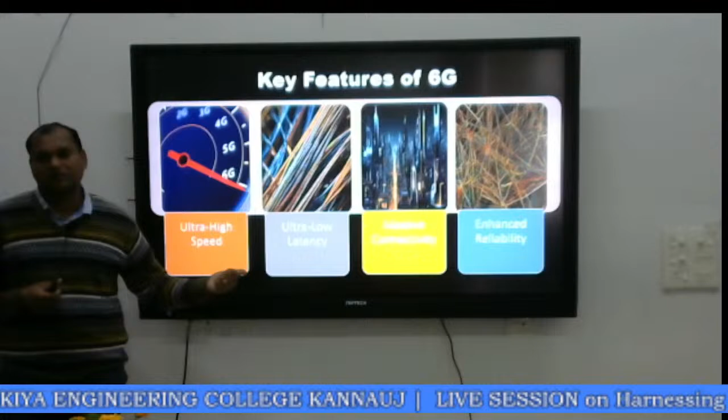And then what is going to be 6G? Are we going to see even higher-speed internet? Or what is so fascinating about 6G that we are going to see? So what we are going to see in 6G is, of course, ultra high speeds. We want to see large uplink and downlink speeds. Then ultra low latency: the latencies between the end-to-end transmissions, you want to reduce them.

Then massive connectivity: you want to connect the majority of the devices on the internet. And enhanced reliability: you want your communication systems to be more reliable. Okay, I'll talk about all these things in the future slides, so I'm not discussing them in detail here. So there is something called the International Mobile Telecommunications.

This actually is the part of the ITU. ITU is the International Telecommunication Union. Now, how these standards are made, I think you should be familiar with how these standards come about. When we talk about 4G, 5G, 6G, or we talk about Wi-Fi, we talk about Bluetooth, any wireless application you see, there is a standard to it.

So we should understand why these standards are essential. Now suppose if I come up in India, let's say from IIT Ropar, saying, okay, this is my standard. I want to build devices according to this set of standards. Set of standards means set of rules, how you want to communicate. For example, what is the bandwidth, what is the modulation scheme, what are the code rates, and so on. So these are a set of rules over which you communicate.

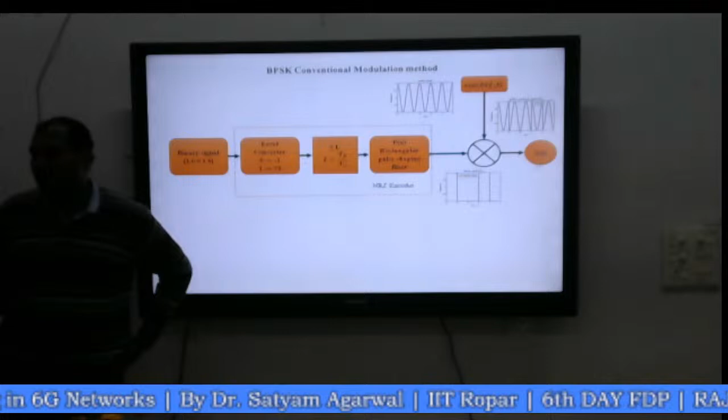Now, I'm going to talk first about the conventional way of receiving the BPSK signal, and then if I employ machine learning, how the receiver structure changes and what performance improvements it brings.

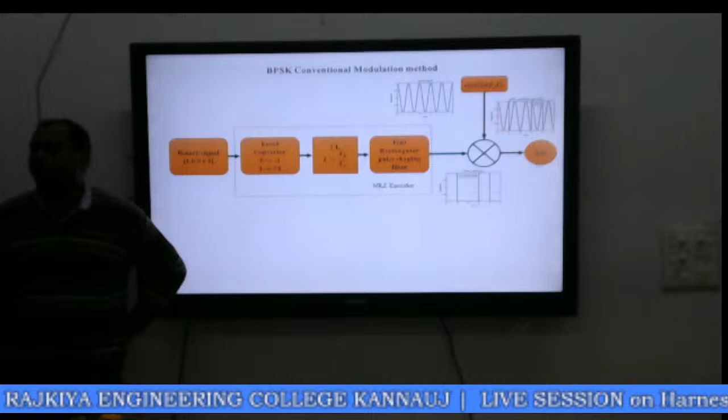So this is first the transmitter part. If you have a BPSK signal and you want to transmit it, you take your binary message signal, first do a level conversion, you do line coding, then you up-convert it, pass it through a pulse shaping filter. How many of you understand what a pulse shaping filter is? How many of you understand what ISI is? Intersymbol interference. So to counteract that intersymbol interference, you do some pulse shaping. And once you do the pulse shaping, you multiply it with your high frequency carrier, and then you transmit it.

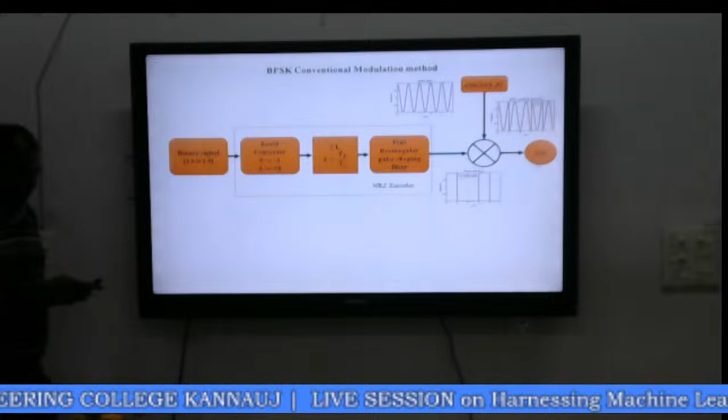And then what you do at the receiver is you take your received signal, multiply it with the local oscillator, pass it through a low pass filter, then you do an integration and then you apply a threshold.

Now, so here you see the main problem is the carrier that you used at the transmitter, that is cos 2 pi FCT. So FC is the carrier frequency. What you do at the receiver is you multiply your received signal with the same carrier.

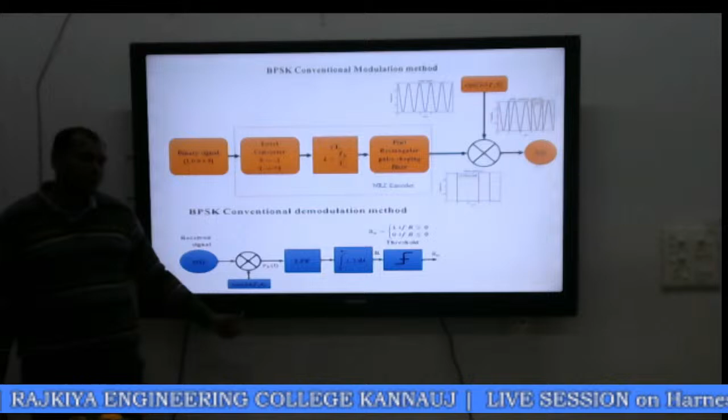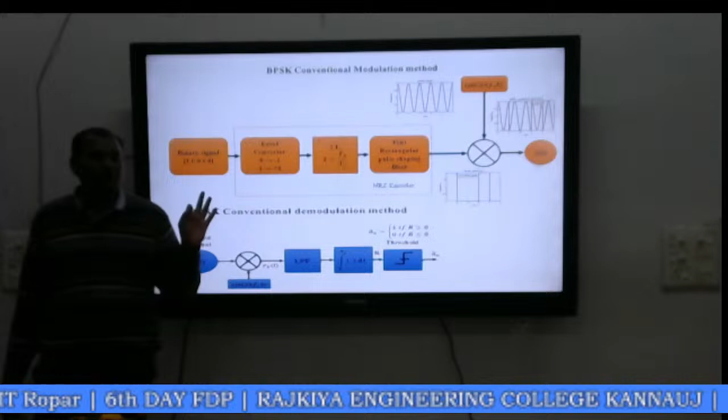Now what happens is this carrier at the receiver is again locally generated. How do you generate a carrier? You use crystal oscillators. Now no two crystal oscillators are going to give you exactly the same frequency. There will be some variation because of temperature variations, mechanical vibrations and so on. So there will be a small phase shift, frequency shift.

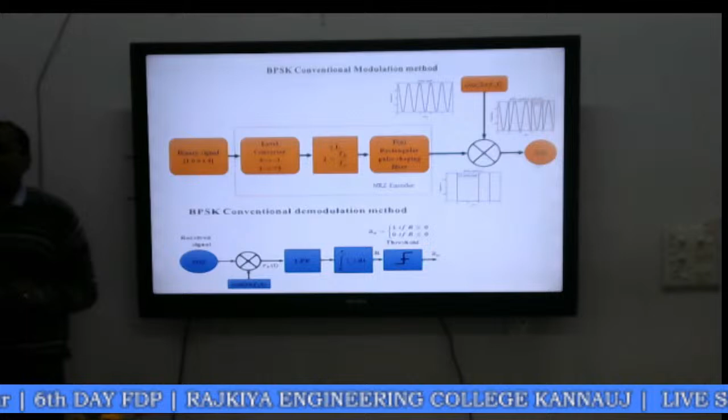When there is a frequency shift here, it propagates to the other parts of the receiver. Now there are systems which can synchronize your receiver frequency with what you transmit. This is called frequency synchronization.

So some of the challenges that you face in a conventional receiver: first, your signal is corrupted by noise, so you are not able to decode it. Then you have path loss, which means as the signal propagates through the medium, it will attenuate. Then you have fading. Then you have a synchronization issue. This is a big issue.

When you are traveling at high speeds, suppose you are in a car or on a train, Vande Bharat let's say, which moves at 160, and we will have high speed trains which will be even faster, there is a Doppler shift in your signal. Because of that Doppler shift, your frequency will keep on changing, fluctuating.

And because of the fast changing channel, if you're using large bandwidth, you're also going to see frequency selective fading. So because of all those things, you will have synchronization issues at the receiver. The receiver has to synchronize the frequency and phase again and again.

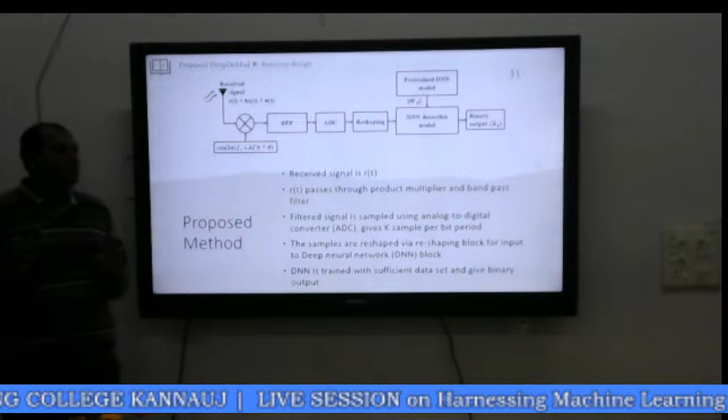After that, you do sampling, because everything has to be done in the digital domain. So first you do the sampling, bring it to the digital domain, and then you do all the processing in the DSP, digital signal processing. So when you are sampling, you first multiply with cos, the other time you multiply it with sine. When you sample the cos component, you get the in-phase, I. When you sample the sine component, you get the quadrature, or Q.

How many of you could understand this part? How many of you could understand this part? This is an important part. So let me explain again.

See, when you are transmitting any signal, let's say you want to use carrier frequency Fc. Now you know cos and sine are orthogonal to each other. So you can modulate sine as well as cos. You modulate one stream with cos 2πFct, another stream you multiply with sine 2πFct. They are on the same frequency, but they are orthogonal to each other, which means they won't interfere.

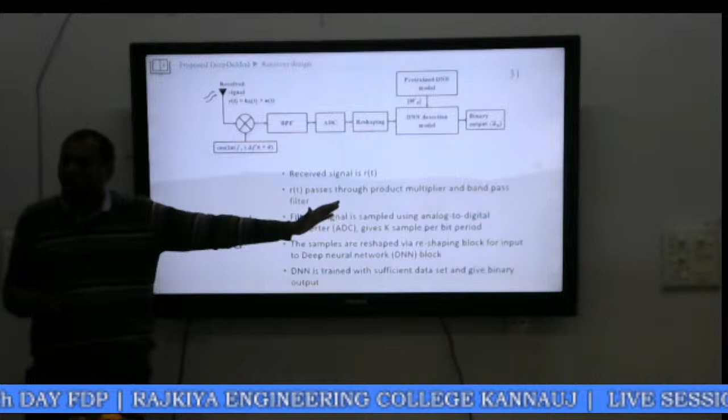So when you are demodulating also, you make two branches out of it. First you multiply with the cos, you get the cos component, you multiply with the sine, you get the sine component. So therefore you get I and Q. I and Q means you get complex samples, I + jQ, complex samples of your received signal. Now once you get these samples, you push them into your DSP and do all the processing. There is a lot of complex processing that goes into your DSP. It is not very simple.

So for all the faculty who are here, last year we actually conducted an MTech laboratory, a communication lab, and in that we introduced these hardware kits to the MTech students. We got around 10 hardware kits, and we made them understand how the reception is done in actuality.

On hardware. So they did the programming on these devices, and they could see for themselves, once you get these samples, how you do the processing. Okay. So how you do the processing is, first you apply actually the automatic gain control. So you have to control the gain of your signal.

Then you apply the frequency synchronization. So you see you have to correct this delta F. Then you apply phase synchronization. That means you have to correct this phi. Then you have to understand the timing synchronization. Timing means, because everything is digital, you understand the bit period. So your bit 0 will be for some time, bit 1 will be for some time, and so on. So there is a bit period. So you have to synchronize the bit periods also.

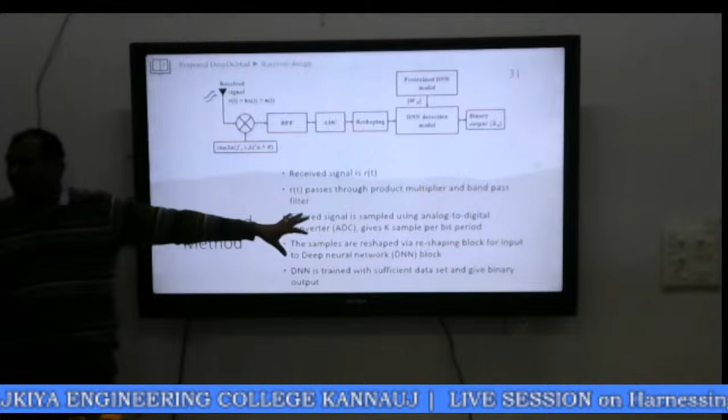Once you get those samples, then you apply your threshold detector. Then you say, okay, for bit 0 I have to see whether positive voltage is there or not. For bit 1 negative voltage is there or not. And then I decide bit 0 or bit 1 and then push it further. Okay. So this is a complete process that goes on in going from the sampled signal to the bit demodulation.

Now applying machine learning to it, how we applied it is like this. We took the received signal, passed it through the local oscillator, and then of course we passed it through a band pass filter. Rather than a low pass filter, we used a band pass filter and applied the ADC. So the sampling is done here. Once you do the sampling, the rest is now going to be pushed into the DSP. The digital signal processor, or any processor, will now process your samples.

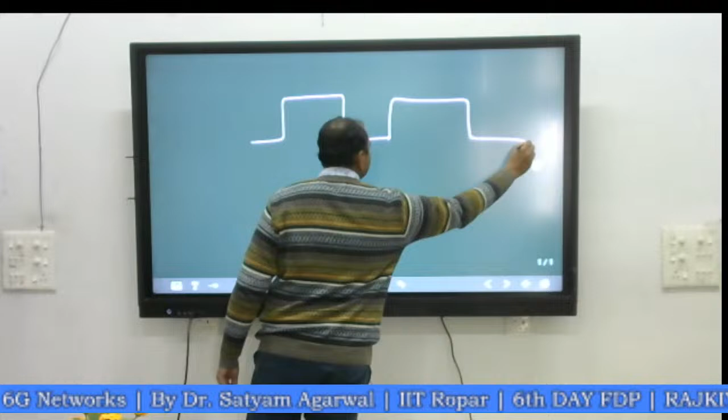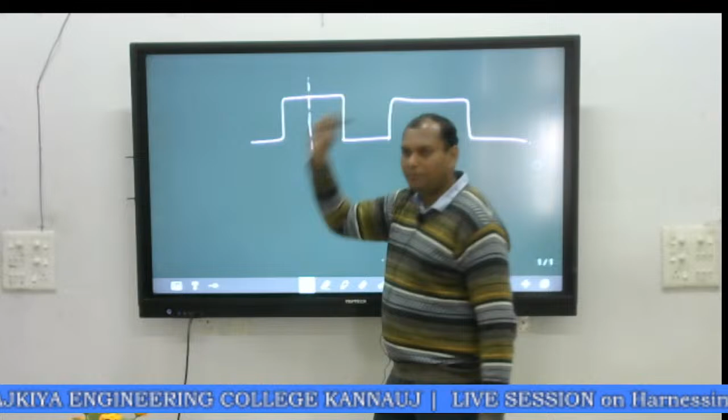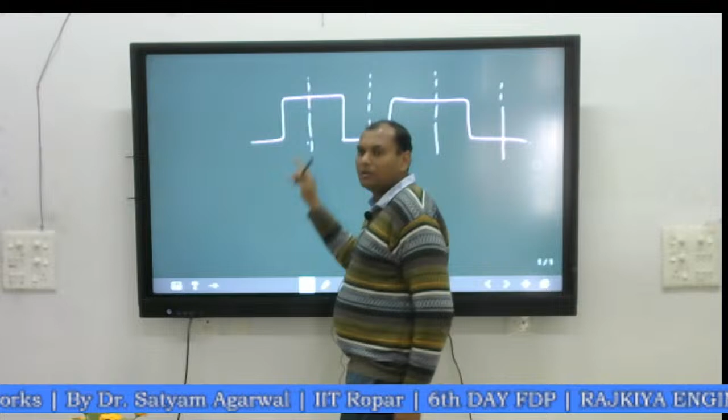So this is your signal that is coming, right? This is a low pass signal. So what you do is basically you have to sample it. Ideally you would want to sample it at the middle of the bit. Okay, so you want to sample it here. And of course you want one sample per bit period. But what you do in actuality is you sample multiple times in a bit period. So that means you take 2 or more.

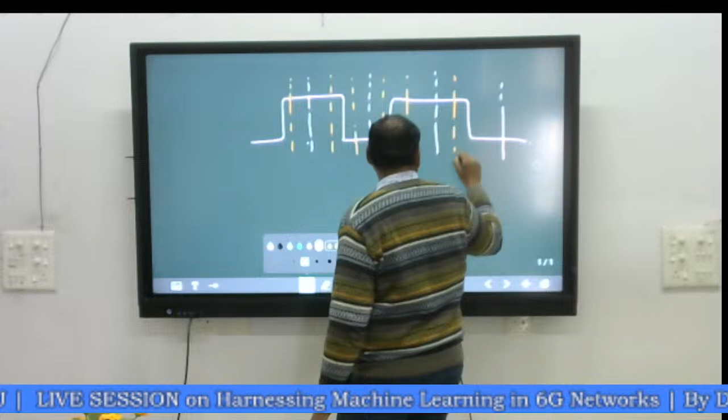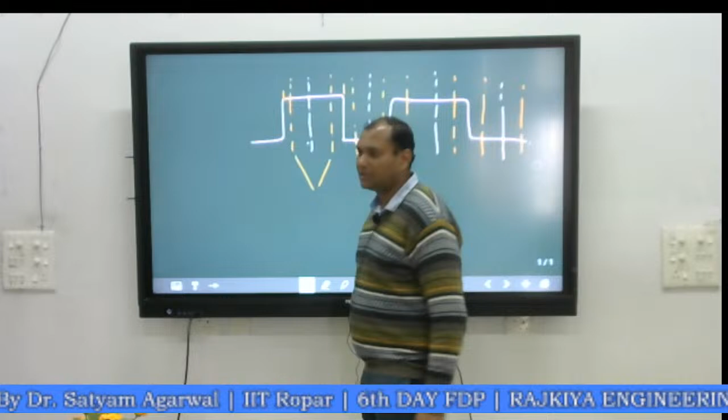So let me draw it like this. So you take two of them. Okay. Why do you take this? Because you want to understand where the bit is starting, where the bit is ending. One sample cannot give you that information. So you need multiple samples.

That is the first thing. Second thing is, once you have done the sampling, you cannot change the samples. Once you have sampled the signal, you cannot change it. You got the samples, that's it. Now the DSP has to do everything. Now in this orange case, if you see, ideally I should sample it here.

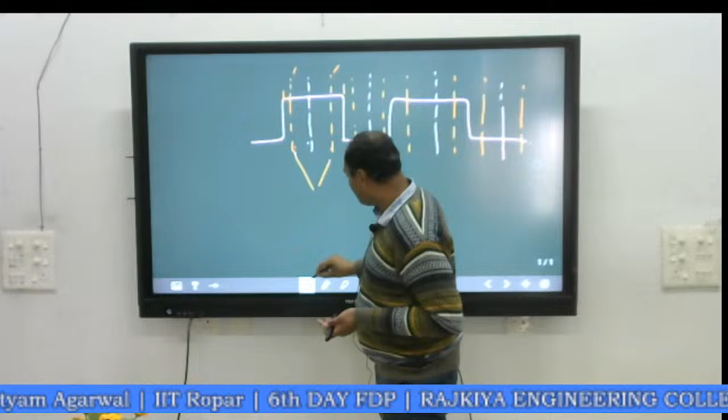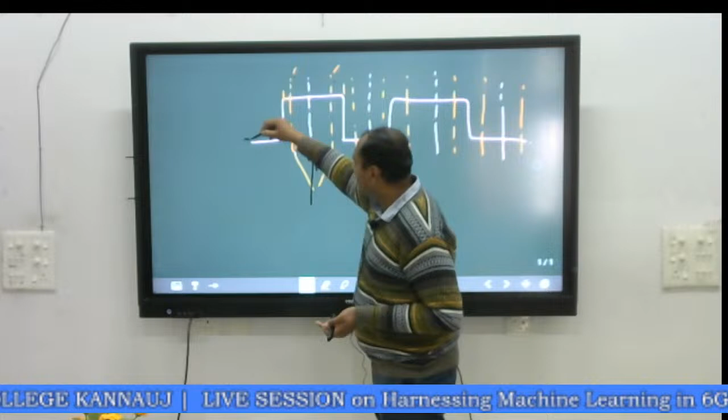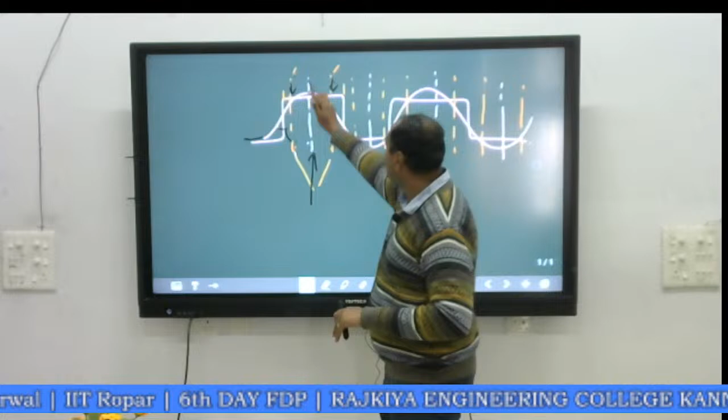But my orange, if you see, it is shifted. What will it give rise to? Suppose there is ISI, what will happen? This will merge into this, so your signal will be something like this. So if you sample at the edges, you will get noise or interference from the previous symbol. So you need to correct the sampling times. What you want is your orange should come here, so here you should sample.

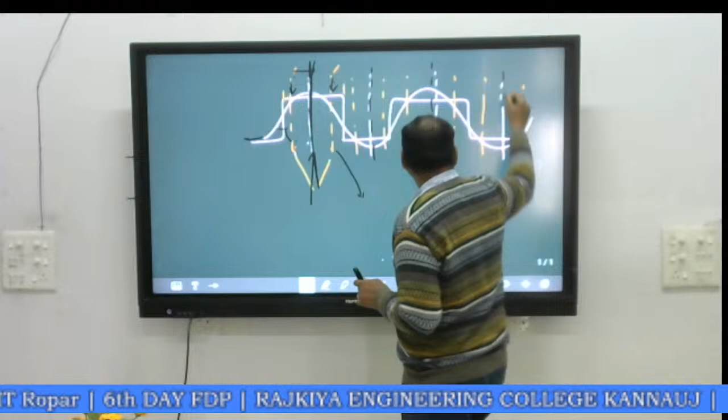So what you do is, you go to the DSP, apply multi-rate signal processing, and you interpolate. You first take these samples and go to a higher rate. Higher rate means you will get samples in between these, and then you interpolate from these two what should be the value here, and then you use these samples. It's a complex process; I'm just telling you very briefly. So this is how you do it in your communication systems. You first sample it, correct for the symbol timing, and then the sampling times.

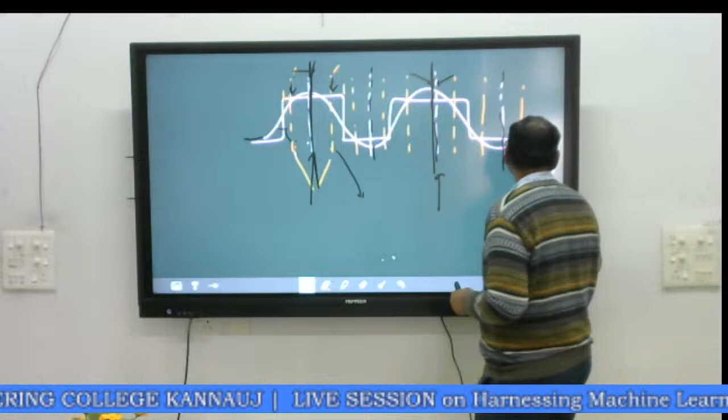Okay. Is it okay? Okay.

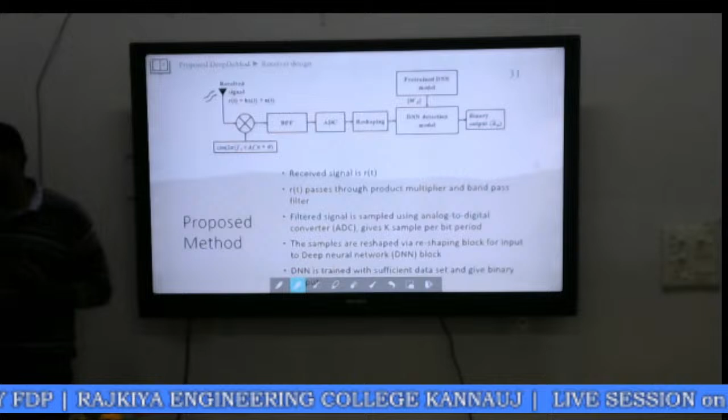Yeah, so I was talking about that thing. The one thing that we introduced is that we sampled at a higher rate than is normally done. So let's say we got 5 samples per bit. This is what we defined as K here. The filtered signal is sampled using an analog to digital converter, giving K samples per bit period. K could range from 5 to 20.

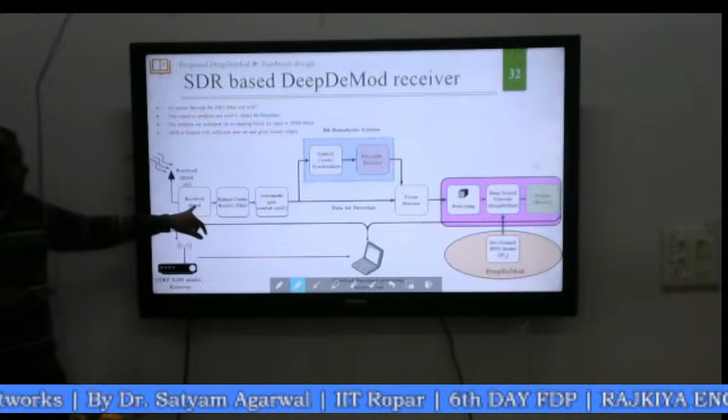Now what we did is that we took our hardware, which is our SDR, software defined radio, and we coded it with our machine learning based demodulator. So how did we do it? We took the received signal, applied a raised cosine filter, AGC, symbol carrier synchronizer, symbol preamble detector, and then we applied the DNN, which we call DeepDeMod, the deep neural network, which is able to demodulate our received signal.

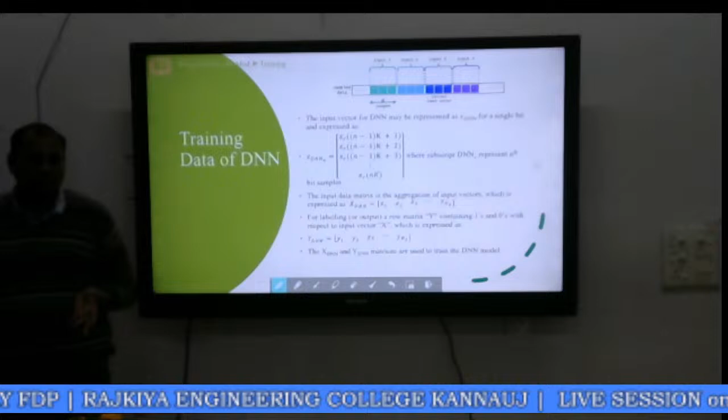So this was the architecture of the DNN. We took 5 layers in the DNN, and 7 neurons, and all the things are there. You know that all these machine learning algorithms need to be trained first, and training was the trickiest part. We took half synthetic data, generated using MATLAB, and half measured data from the environment. We combined these two, made a big pool of data, and then trained our model.

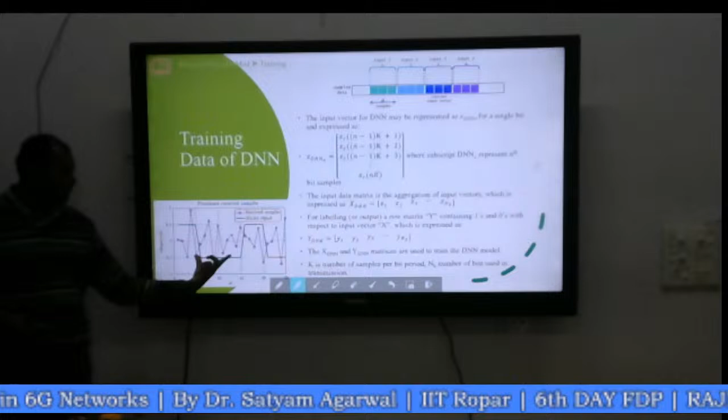So once we train our model, this is how it is going to look. Over a bit period, you get multiple samples, which fluctuate like this. You take this set of values, and for this set of values you get one output, which is bit 0 or bit 1. So K is your input layer and 1 is your output layer.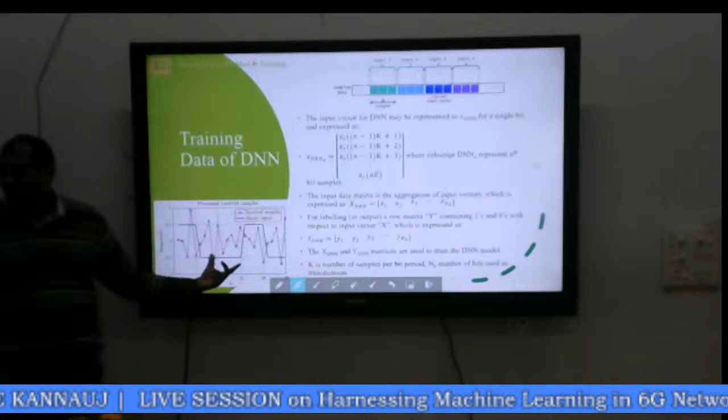And you know that the wireless channel keeps on fluctuating, so you need to retune your machine learning algorithm so that it adapts to the changing environment. We did this using transfer learning. In packet transmissions, you transmit something called pilots, which are used to estimate the channel. So you use the same pilots to retune the DNN. The DNN will learn how the signal is mapping, adapt to the environment, and be optimal for that environment.

Just like everyone does, we started first with a simulation exercise to see whether the improvements are there or not, and then we moved to the hardware part and showed how the improvements are in actuality. So this one is the bit error rate versus SNR in the AWGN channel. Everyone of you understands the AWGN channel; it has no fading.

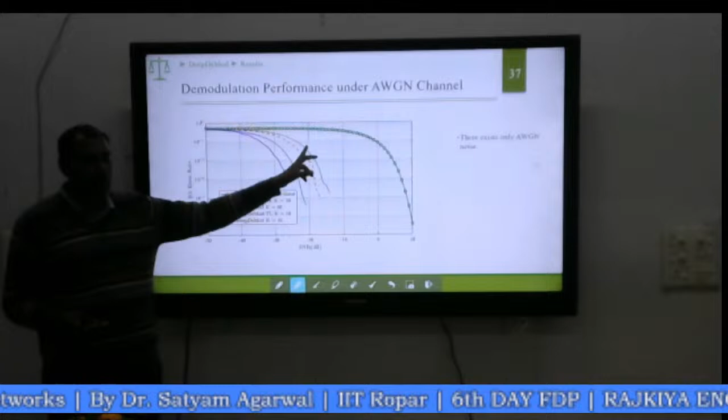The green one is the conventional demodulator. For bit error rate, the lower the better. The conventional is quite high, and then you see our DeepDemod, the deep learning based demodulator, for different values of K, the number of samples per bit. We have taken 10 and 50, and TL is the transfer learning based one. The performance gap is huge. To get, let's say, 10 to the power minus 3, I would get it at minus 15 dB, compared to 8 dB in the conventional case. So see the gains here.

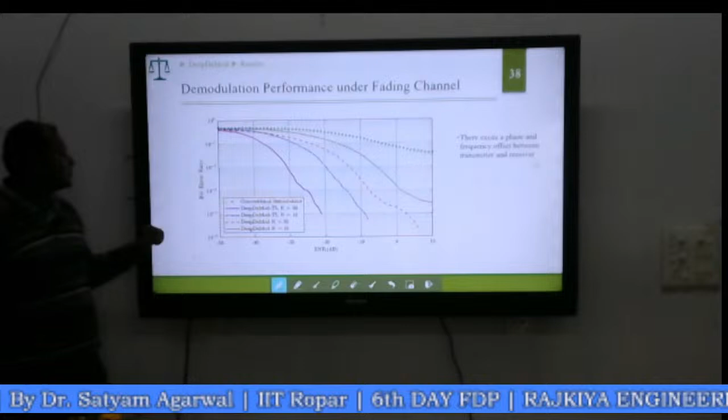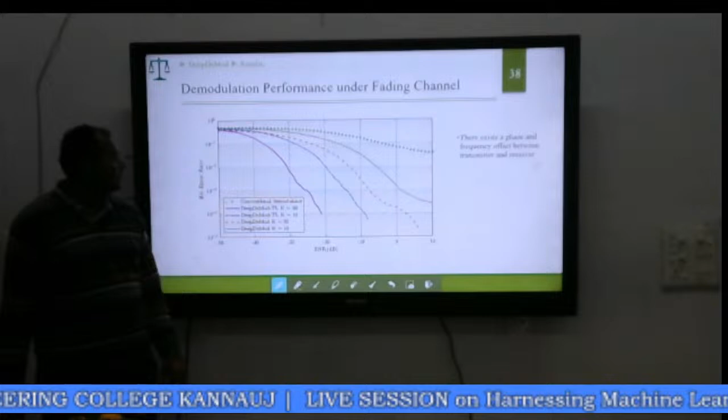And similarly we observe it for the fading channel also. For the fading channel, when there is a phase and frequency offset between the transmitter and receiver, the conventional BER is quite high. For 10 power minus 1, you need an SNR of, let's say, minus 5 dB, compared to minus 15 dB in our case. So more than 10 dB of gain you can see in the machine learning based demodulator.

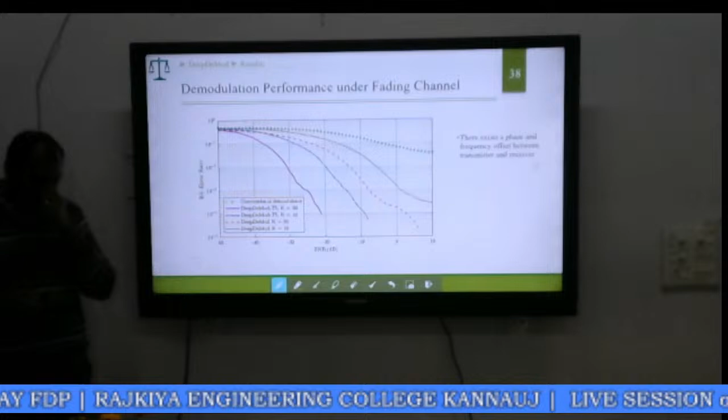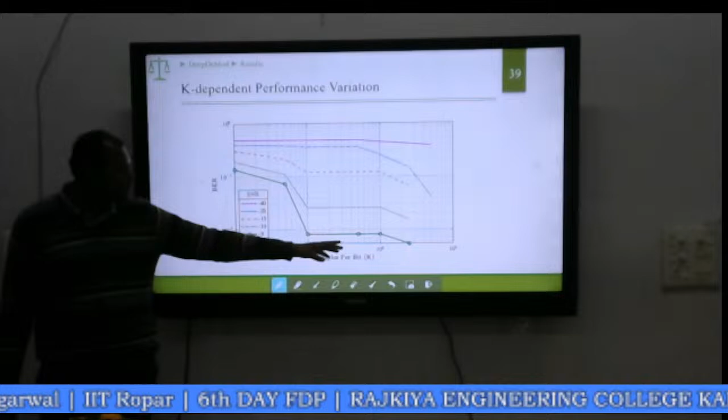Okay. And then you would be wondering how the system will perform if we increase the number of samples per bit. So we actually started with 10 and went up to 10^3, so 1000 samples per bit. So if you keep on increasing the number of samples, you are going to see huge improvements in the BER. Now the side effect is that if you collect more samples, then your processing also increases. You have to process those many samples for every bit.

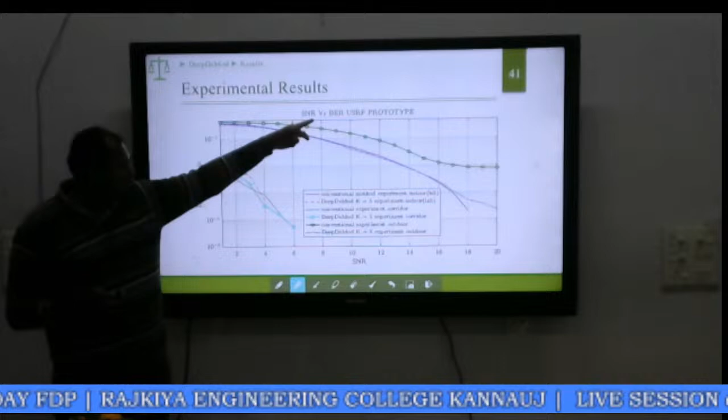So this is the result that we got from our experiments. Indoor, corridor, and outdoor are all there. We took k equal to 5 only, so 5 samples per bit. Here the green one is the conventional one, and this is our DeepDemod, which is deep learning based.

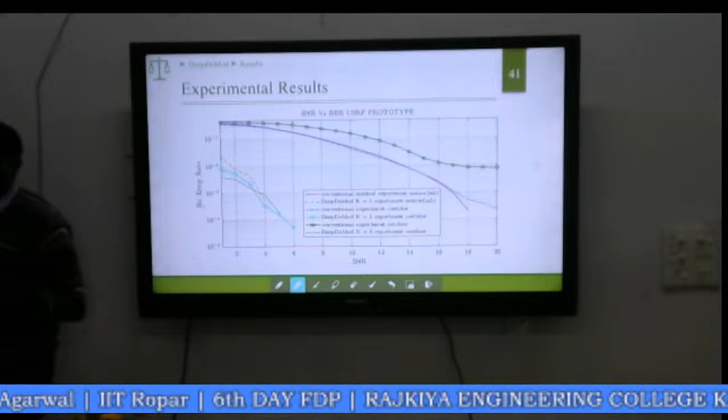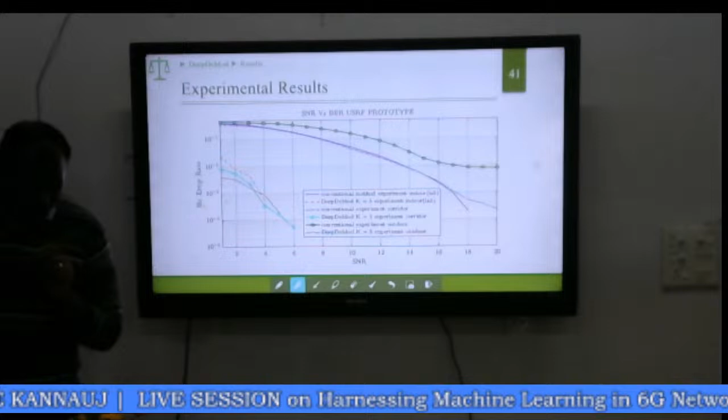So let's say for 10^-2, I would achieve it at 2 dB SNR, as compared to this one, which will achieve it at 14 dB. So again, you see 12 dB of improvement. Okay. So these are experimental results. Okay, so this is the first part of my research talk. If you have any questions, I can take them up now, or otherwise we will move forward.

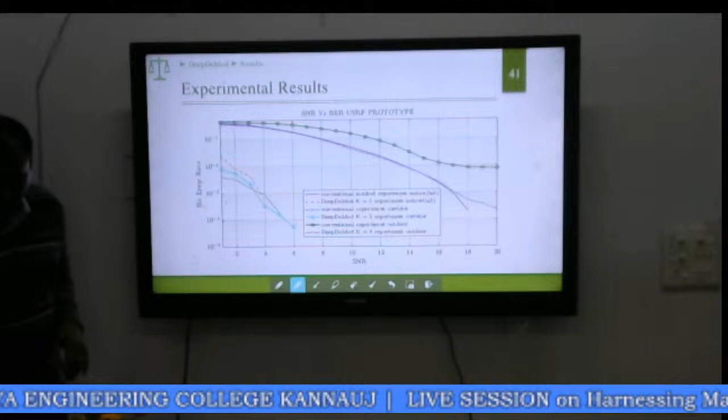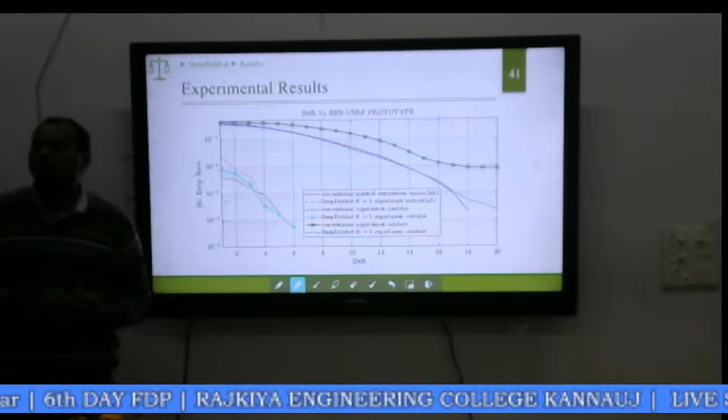All right. So till now we talked about the SISO system. SISO means single input, single output. That means single transmit antenna, single receive antenna. Now you see our communication systems are now becoming MIMO. Everything is MIMO. So you have multiple transmit antennas and multiple receive antennas. So we are going to take one step forward, and now I am going to talk about the MISO system. MISO means multiple transmit antennas, single receiver. So this is MISO. You have multiple transmit antennas, and there is one receiver, which is a single antenna. Okay.

So what is the gain that you get in a MISO system? Why do you want to go to MIMO? What is the motivation behind going to a MIMO system? Anyone? Better data transmission. Okay. And high throughput. Okay. Anyone else? Energy consumption is less. Okay. Anyone else? Why do you get high throughput? Can anyone tell that? Why do you get high throughput in MIMO systems?

Sorry? Connectivity. Faster connectivity. No, give a technical answer. It's reliable communication. Yeah, but why is it reliable? Why does it give reliable communication? So you know one of the major problems of wireless communication is fading. What is fading? When I am transmitting a signal from here to there, the signal can go directly. It will reflect from the wall, from the floor, from the ceiling, and so on.

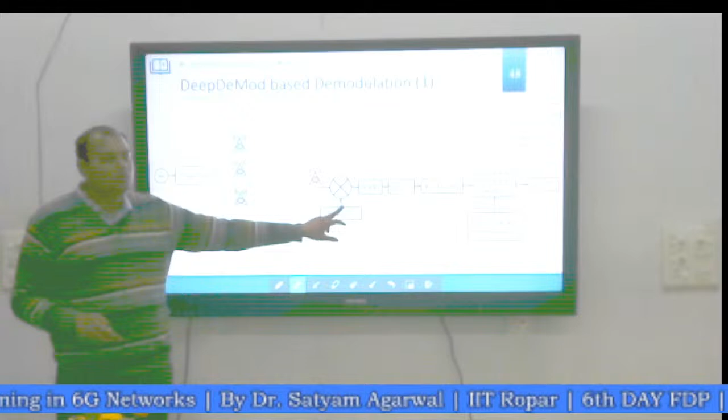So what we do is we use deep learning, a deep neural network, to receive this MISO signal and demodulate it without using channel state information. Without using CSI, we are going to demodulate the signal. So again we do the same thing: we receive the signal, multiply with the local oscillator, apply the low pass filter, then the analog-to-digital converter, and then the DNN, the neural network.

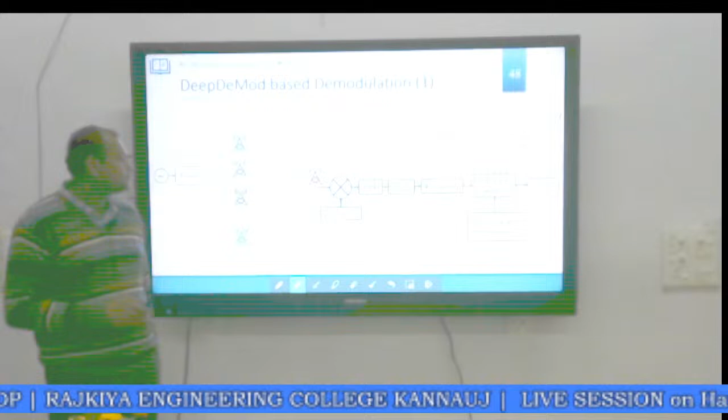Okay, so I am going to show you the simulation results now. So again the green one is the conventional demodulator for one transmitter, one receiver. And then we have Alamouti for two transmitters, one receiver. If you are using a MISO system, Alamouti is the optimal solution. Then we have maximum ratio transmission with estimated channel, two transmitters, one receiver, and MRT with channel known, two transmitters and one receiver. So these four are here.

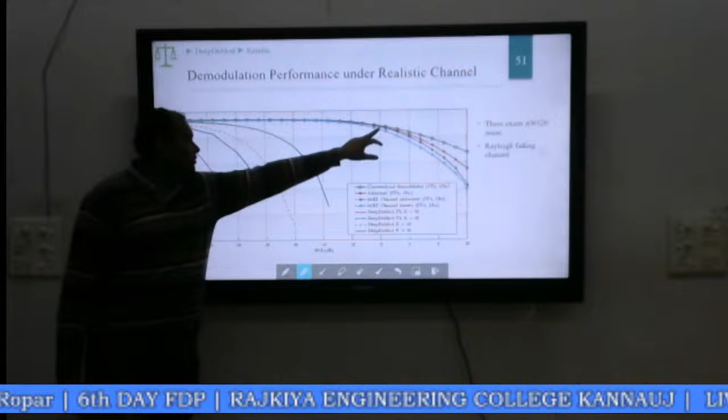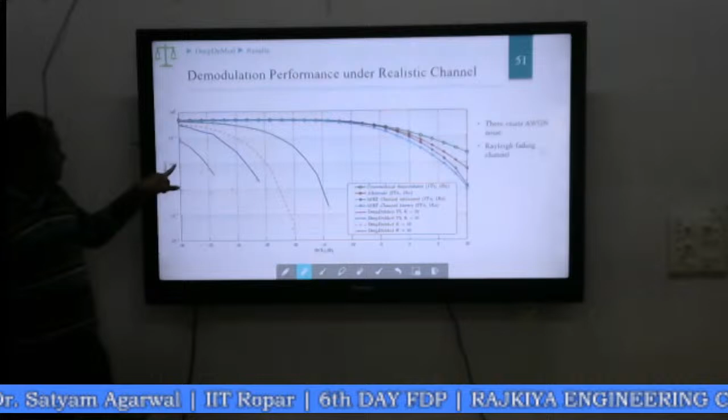You can see the bit error rate performance of these conventional systems, and if you use DeepDemod, you can see the performance improvements here. With k equal to 50, you see these two, and with k equal to 10, you see these two. So let's say for 10 power minus 2 BER, I can achieve it at minus 17 dB versus if you use that, you have to have 6 dB SNR. So about 20 dB SNR gain.

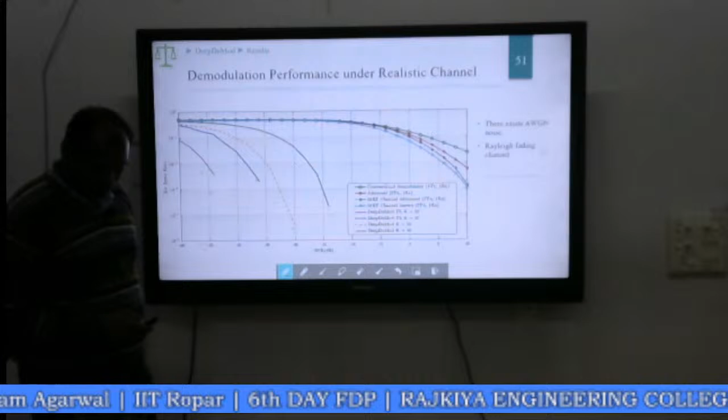Okay, so this was for the fading channel. I'm not going to discuss that again. Same thing. So we did the experiments for this also. This is our transmitter with two antennas, and the receiver is on the other part, and we did it in an open area. Okay, here.

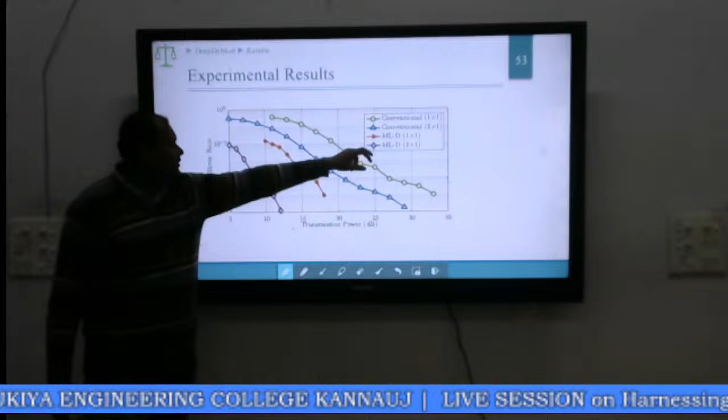And these are the experimental results. So four things I have plotted here: the conventional 1x1, 2x1, and the ML based detector 1x1 and 2x1. So if you see the green and red, so these are these two. So again for 10 power minus 4, you can get it at 17 versus 21. And if you use an ML based detector for a MISO system 2x1, so this is the purple one and the blue one.

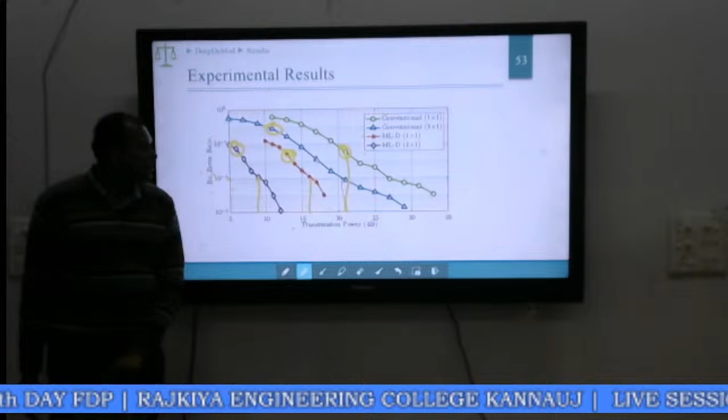Okay. So again for 10 power minus 4, you get it at 8 and this one, right? 8 and 21. Okay, sorry, this one also. Okay, so again you can see the gains, 15 dBs of gain. So this was about the MISO system.

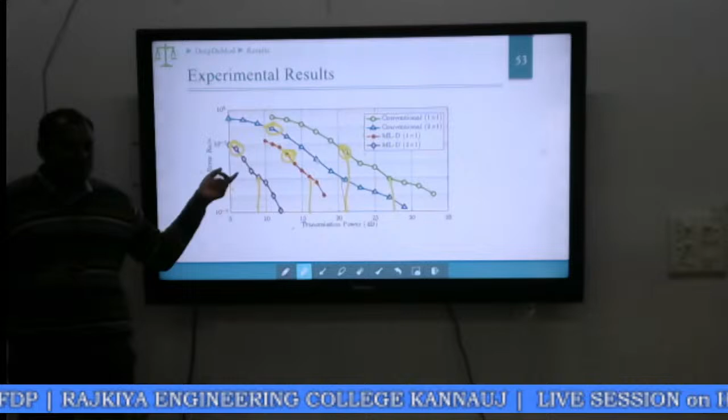I'm going to take just one step more, talk about distributed MISO, and then I talk about what is the challenge here. Though you are going to see good gains, what is the challenge, that is also important to understand. So distributed MIMO: now you see when you have a MIMO system or a MISO system, your transmit antennas are sitting on the same system. So for example, I have a mobile phone and suppose if it has two antennas, it will be connected to a single crystal oscillator, which means that it is being fed by the same source.

Okay. Now you see in IoT systems, you want to have your devices to be very low powered. You do not have the luxury to build multiple antennas on the same device, because that will make your device bulky, that will consume power and so on. In those cases, you want to use the concepts of MIMO, but you want your antennas to sit on different devices altogether. So one IoT device is here, second one could be in another room. They should collaborate together and transmit the information to the receiver. So this is what we want. Multiple transmitters come together to send information to a very far off receiver.

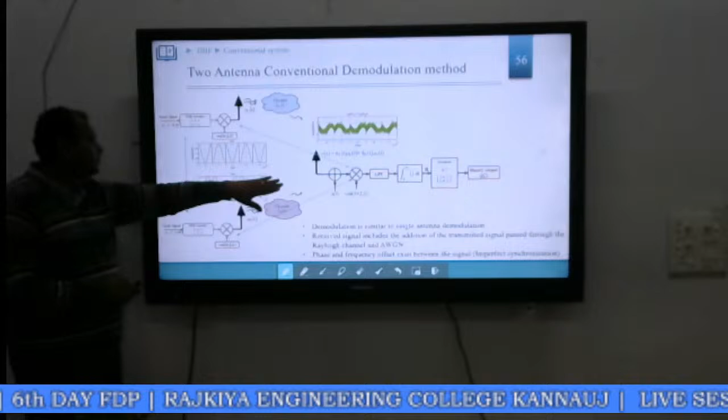Okay, so we call it distributed beamforming or distributed MIMO also. Of course you get the same gains as that of MIMO; I'm not going to go into that. So suppose I've taken two transmitters transmitting the same signal, with different frequency and phase offsets, you get a complex signal at the receiver. From this complex signal at the receiver, you have to figure out what bit was transmitted.

So another example is an orchestra. If everyone is playing in a different way, you won't get anything. But if everyone plays coherently, then you hear a nice melodious sound. So the same thing here. So these are the challenges: carrier synchronization, phase synchronization, timing synchronization, and coordination of the information between the different transmitters. Okay, so again what we did is we applied the deep neural network to our receiver and implemented it on the hardware as well. So again, I'm not going to do the same things.

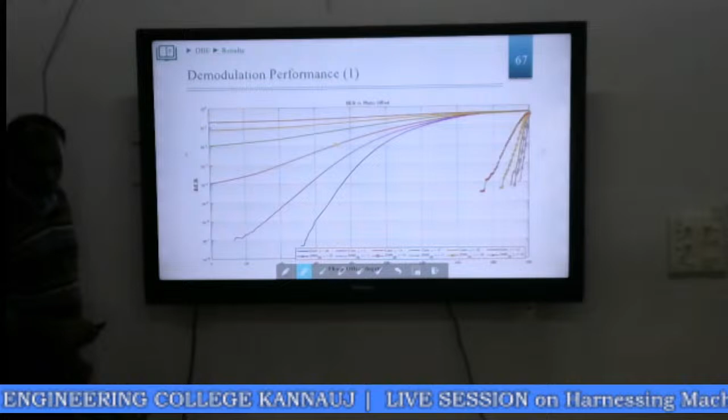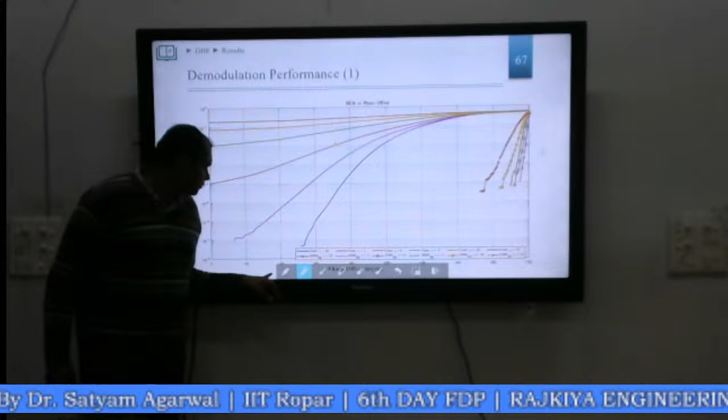So this is the demodulation performance. So here actually I have projected phase offset. Okay, phase offset in degrees versus the bit error rate. So if you have two transmitters, suppose they transmit at exactly the same frequency, but there is a phase offset between the two. Okay. Now if there is a phase offset, what will happen at the receiver? These two signals will combine together.

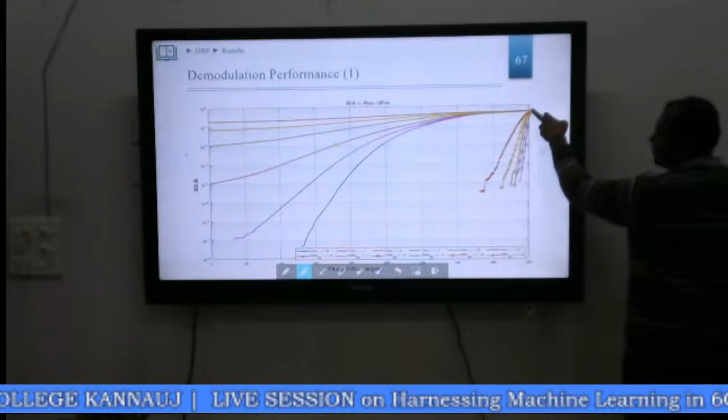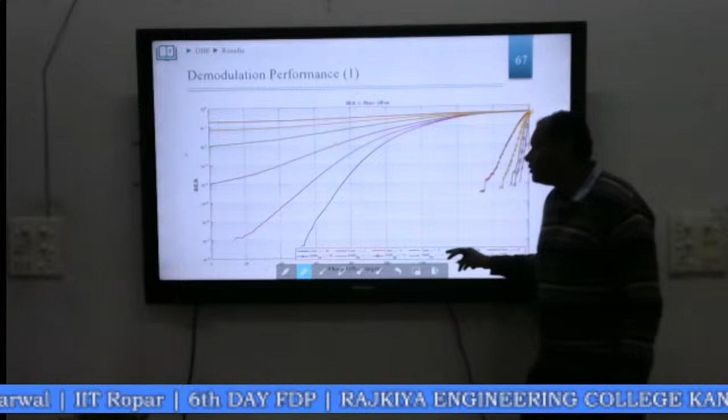So suppose if they are 180 degrees out of phase, then these two will subtract and you will get 0. Right? So the same thing you see here also. So if you see here, this is 180 degrees and the bit error rate is 0.5. 0.5 means you are not getting anything. As you keep on decreasing the phase offset to 0, you get the perfect synchronization. That means these two signals will add up coherently. And in between, there is a gray area where you are going to see the change in the performance.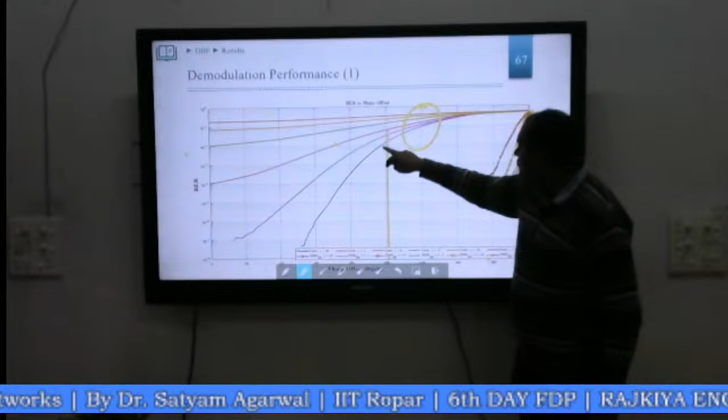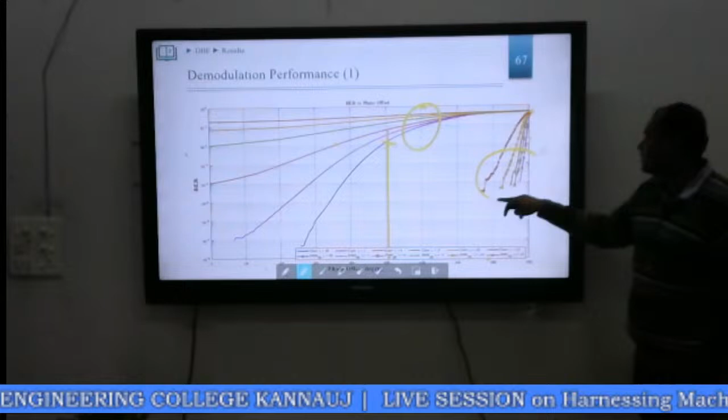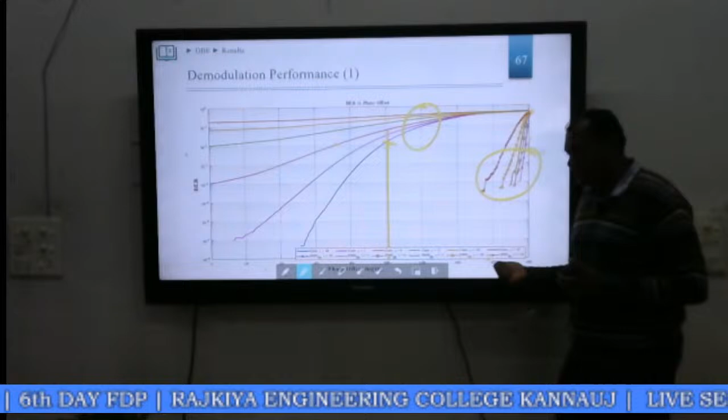Okay. So the point I am trying to say is that even if you have an imperfect combination of signals at the receiver, the deep neural network can still decode your signal, which the conventional receiver cannot detect. Okay. So this is one of the advantages of using machine learning in communication systems. You don't need to bother about the imperfections anymore. The machine learning algorithm can itself understand what imperfect signal you are receiving, and based on that it can make its decision.

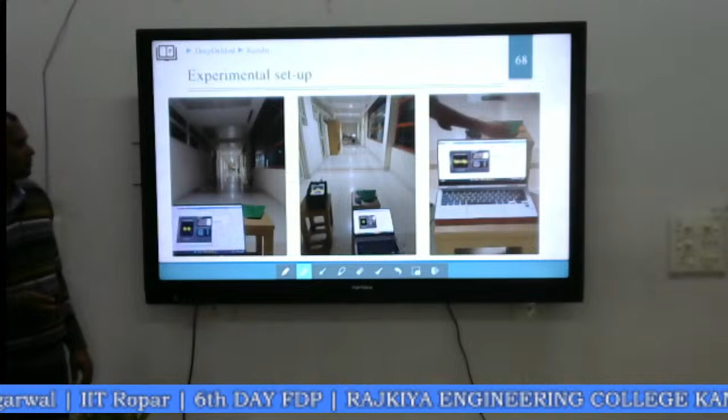Okay. So again we did certain experiments. Yeah, we did some experiments again in the corridors, in the lab, and so on. Okay, so there's a video also. So, by the way, this is the constellation diagram. Okay. So this is a practical thing going on. So see, if you change the transmitter, the receiver location, you see a different constellation. So from these constellations, you have to first correct it, figure out what bit was transmitted.

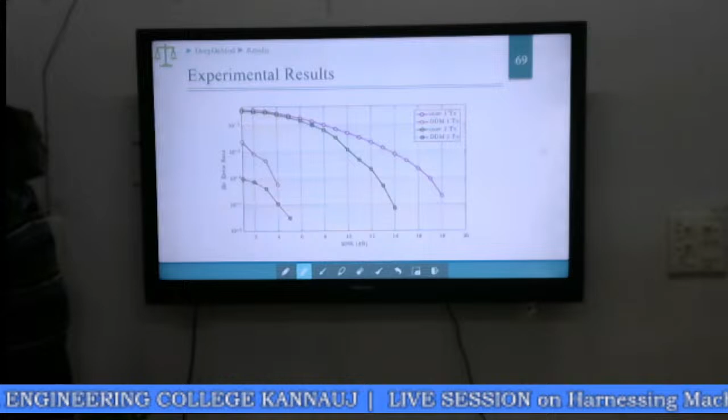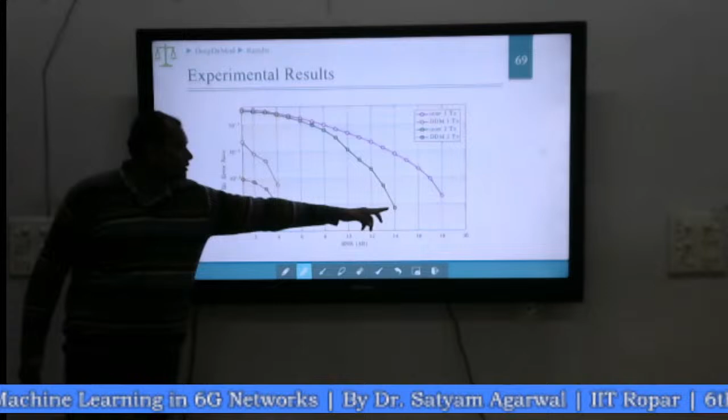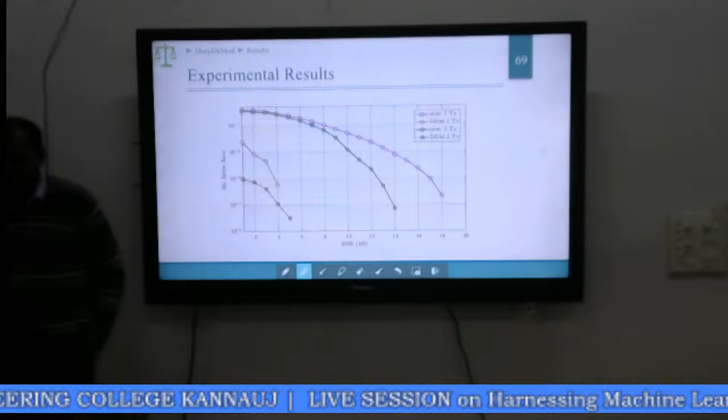Okay, so these are the experimental results. So this is the conventional and deep demod, and then for the two transmitter case, it is here, the green one and the purple one. Okay. Okay, let me finish it, and I have one video also. I'll show that. So this is the impact of our work.

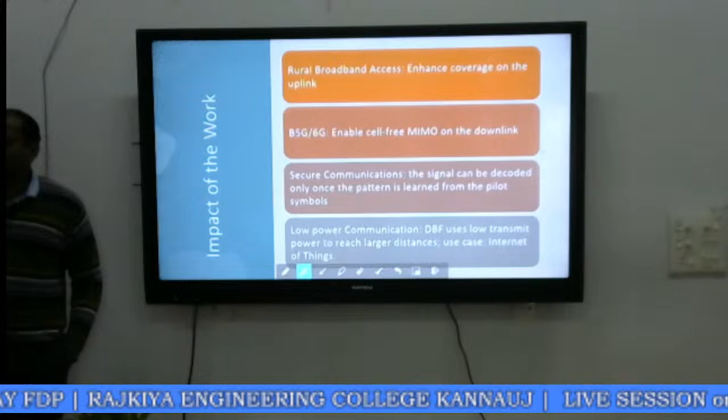We can use this particular technology in rural communications, because in rural areas what happens is that you need larger coverage. Larger coverage means that your signal is attenuating considerably at the cell edge user. So with this technology, you can use your communication systems even at lower SNRs. Then you can use it for beyond 5G, 6G communication systems. You can use it for cell-free massive MIMO.

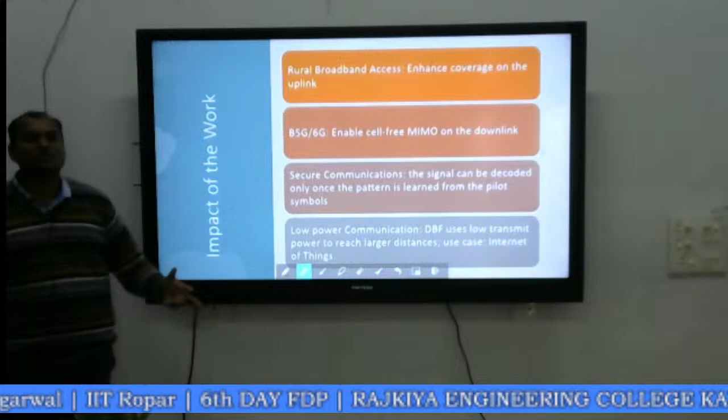You can have secure communications because what we are actually decoding is a pattern, not the exact signal, but the pattern in the signal. Okay. Then we can use it for low power communications for IoT applications and so on. So the application areas are endless in this case. So this is my conclusion.

We are using it for channel coding, we are using it for trajectory designing, we are using it for joint sensing and communications and so on. So a lot of research is going on in this direction. Okay, so this is our lab at IIT Ropar, which is Advanced Research in Communication. And we do a lot of other stuff also.

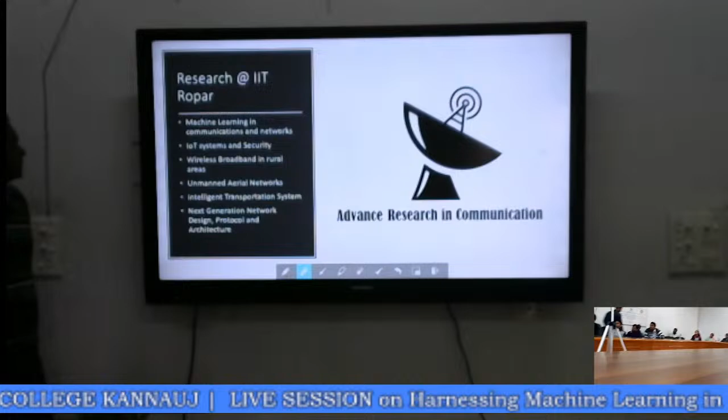So we work on IoT systems and security, then UAVs and intelligent transportation systems. So we are building a test bed around these intelligent transportation systems using UAVs and regular stuff. And again, certain protocols and architecture designs. Okay, so with this, let me end my talk. And I want to show a quick video of our experiment that we did.